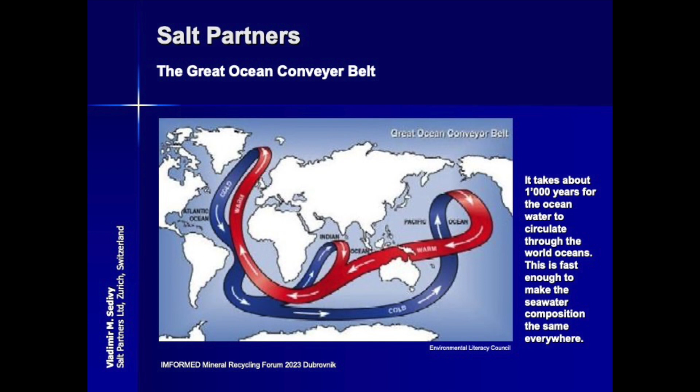The seawater, wherever you start, perhaps somewhere in the Gulf Stream, passing by England, to the north, cooling down and flowing through the Atlantic back to the southern part of the world, and rising, getting warmed up in the Indian Ocean and in the Pacific, and then returning back around the Cape of Good Hope back to the Atlantic. Now, this cycle is very slow.

It takes about 1,000 years for the water to recycle, but considering that the Earth is 4 billion years old, and we have water on the Earth for most of that time, it has recycled many, many times. And this is the reason why the composition of the seawater everywhere in the world is the same. Somewhere it is more diluted, somewhere it is more concentrated, but the composition is the same.

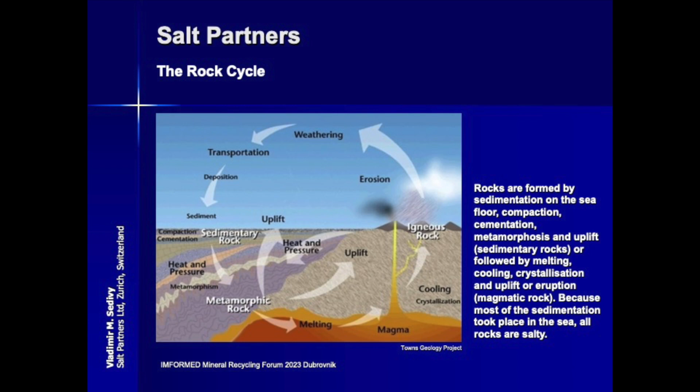Then we have another cycle, we have another recycling, and this is the rock cycle. Most of the rocks, or all of the rocks, actually start with the absorption of carbon dioxide by the calcium present in the seawater, forming calcium carbonate, which then settles at the bottom of the sea as a dust, mud, and proceeds slowly to the deeper parts of the crust until they modify, they cement, they melt, and somewhere again this crust rises up and comes to the surface of the earth as a rock.

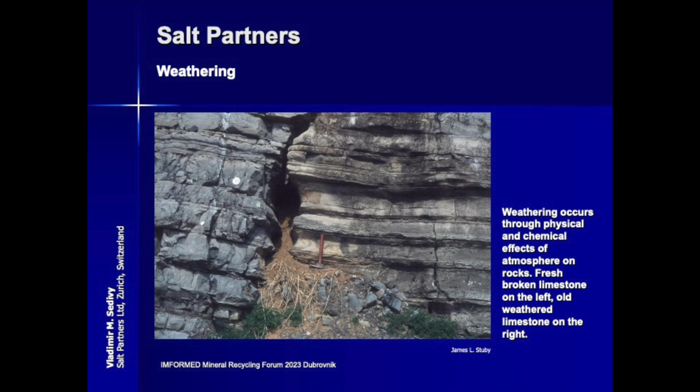Of course, the rock can weather, or it does weather. It is subject to heat and cool and temperature changes, and water effects, carbon dioxide dissolved in the water, and so on and so on. So it weathers. It also weathers by the action of plants and fungi and algae.

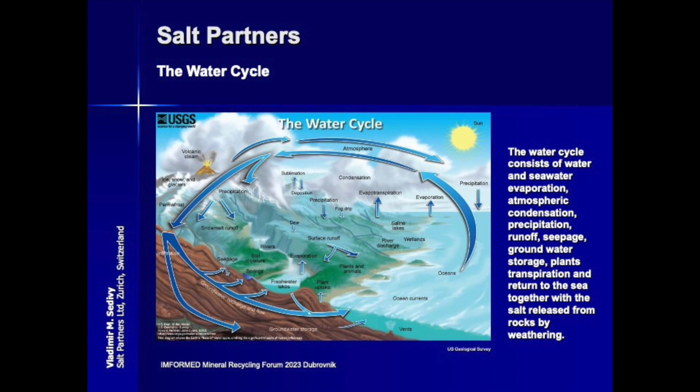And finally, the water cycle consists of evaporation of water from the sea and from transpiration of the plants and getting moved towards the higher areas of the earth where it is cooler, it condenses, falls down as rain, and returns on the surface of the earth, but also underneath the surface back to the sea. So the salt, of course, is a part of the circuit. The salt is present in the rocks. All rocks are salty, and this is how it returns back to the sea.

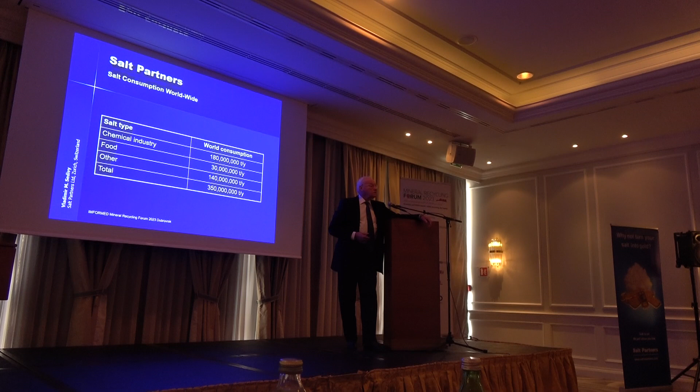What is the quantity of this salt that is being recycled? It's about 4 billion tons per annum. 4 billion tons per annum compares with the quantity of salt that is being produced worldwide, which is around 350 million tons per annum. So only about 1/12, 1/13 of all the salt that is recycled naturally is actually being produced.

And what is the salt being used for? Mostly by the chemical industry for production of caustic and chlorine for production of PVC, which of course is not soluble and is not really practically recyclable, for production of sodium carbonate. Sodium carbonate is used to produce glass. Glass is also not soluble and does not recycle.

So only the salt for food, which is about 1/10 of the total salt produced, is being actually recycled. Whatever salt we take, we also discharge and it goes back. Whatever spaghetti we cook, the water goes back to the sea. So, of course, there is some road de-icing and so on. So only perhaps 30% of the salt that is being produced is actually recycled. So out of the 350 million, perhaps 100 million is being recycled.

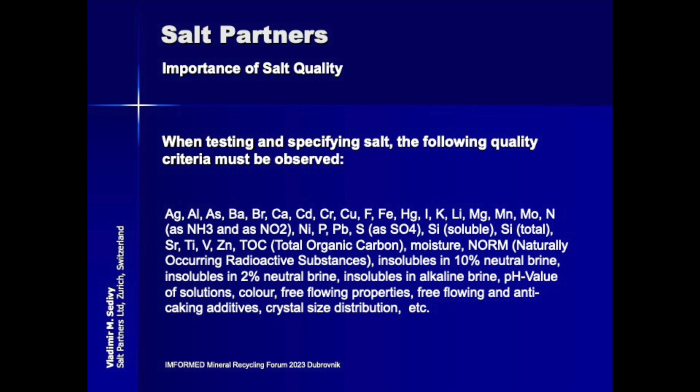When I started in salt some 50 years ago, we were looking at 3 impurities in the salt, or perhaps 4, which was calcium, magnesium, sulfate, and insolubles. Nowadays, when we are testing salt for some use, whoever comes to us and says, I have salt and I want to make salt for human consumption, or for this and that, we say, let's take a look at what is there in that salt, except for sodium chloride. And this is the list. It's a very, very long list. For any use of salt, every one of these elements plays a role.

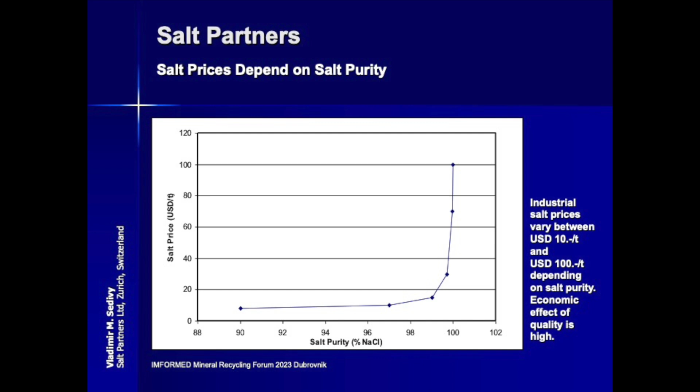Then there is the question of the cost and the price of the salt. This curve shows that generally the price of the salt, cost of the salt, is a question of purity. The purity of the salt that is being produced and consumed starts at around 90% purity and about $10 per ton, and it rises up to $100 per ton for good quality vacuum salt for electrolytical purposes. So there are huge differences in prices.

Does it make sense to produce or recycle salt and compete with new, freshly produced salt specific for the purpose? One of these applications that we are confronted with on a weekly basis, getting inquiries, is a desalination plant with desalination reject. There's a lot of salt in it, and we would like to utilize the salt. The reject has usually around 6, perhaps 7% concentration.

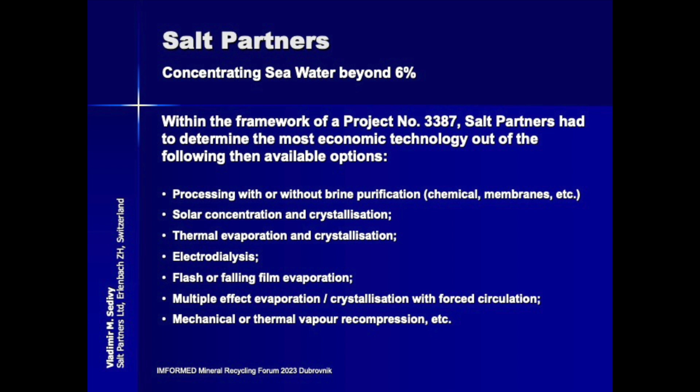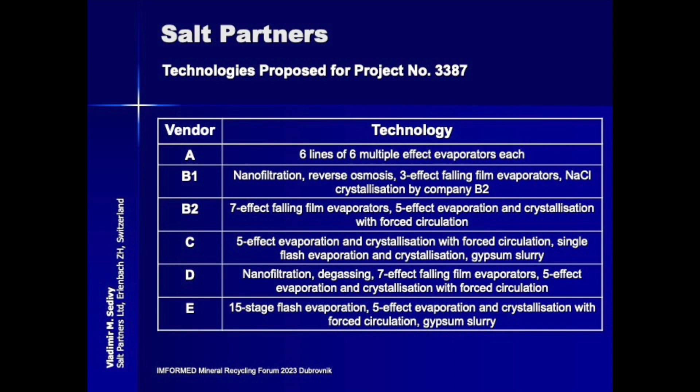We were looking in connection with this project into possibilities, into technologies that exist, and into the cost of these technologies, how to actually make salt. These are the 6 or 7 technologies we looked at, and we calculated the capital cost, operating cost, financing cost, and possible selling price of the salt depending on the quality that can be obtained. These were the 6 major offers after evaluating about 15 various suppliers and their technologies, comparing them. We evaluated the profitability on the basis of the cost of steam and electricity and so on.

We have seen that there was only one that offered a reasonable return on investment. All the others gave 6 to 8%, and nobody would spend money on a large project to get only 6, 7, or 8%, 9% return. This return on investment was quite unique.

It was only due to the fact that the selling price of the salt was very high, in a place where salt was not available. It was also due to the fact that this was a large industrial project with its own power station, and there was a bleed of steam available from the turbine that they didn't know what to do with - condense it or recompress it and reuse it. So there was steam actually available at negative cost, and therefore there was a possibility to do it profitably. But that is unique, and we have so far not identified any other project where this would be possible to do profitably.

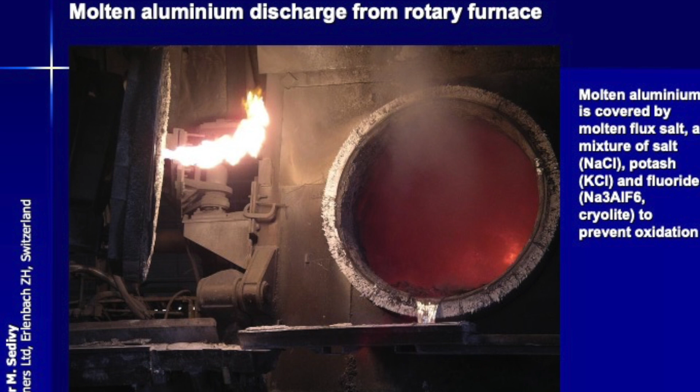There are cases where it makes sense, and one of the cases is aluminium recycling, a project we did in the United States. There is a rotary smelting or remelting furnace, heated with natural gas flame. When the aluminium is melted, it's poured out of the furnace.

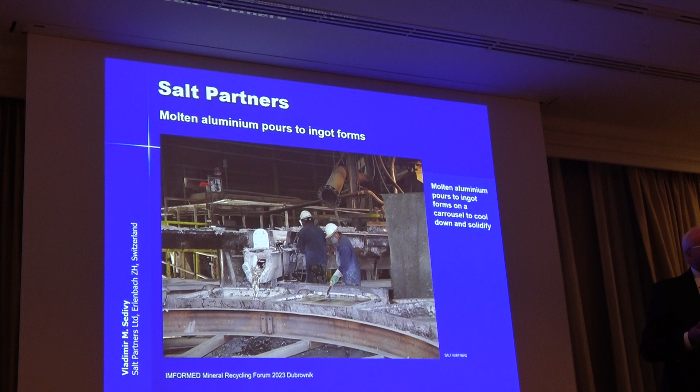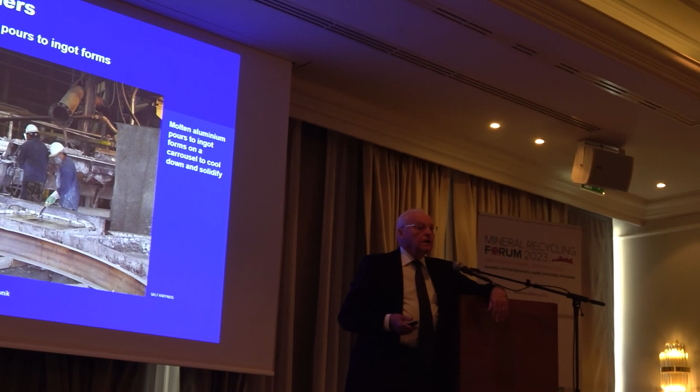In the furnace, the molten aluminium at about 650 degrees centigrade is covered by a layer of salt. But the salt is not just sodium chloride - it's a mixture of potassium chloride and sodium chloride, and this eutectic mixture has a melting point just slightly below the melting point of aluminium. Therefore it's lighter than aluminium, so it floats on the aluminium and prevents oxidation of the aluminium, at least partially. It consists mainly of the salt, but also some aluminium oxide and some burnt carbon from the sugars from the cans, from beer and Coca-Cola and so on.

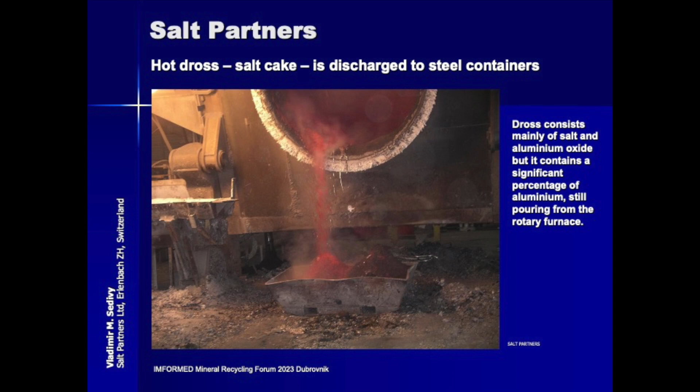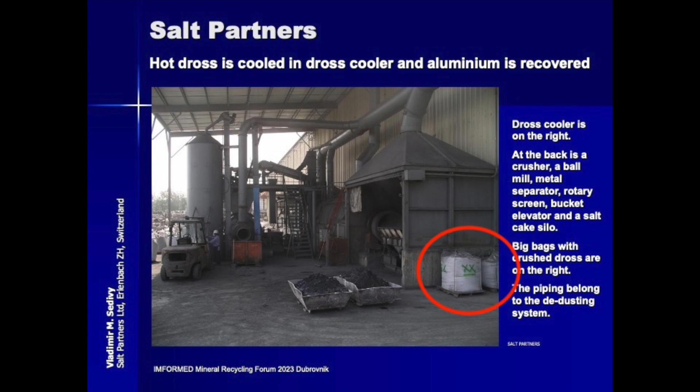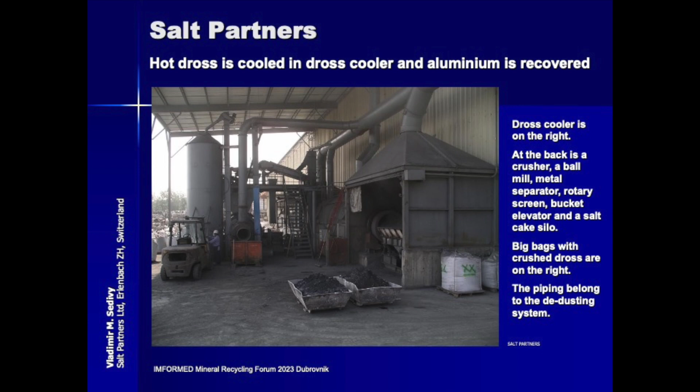And then there's a question what to do with it. When it gets wet, it smells terribly - it's a formation of ammonia and other mercaptans and so on. Terrible thing, so it has to be kept dry. That means storage cost.

At the time of this project, potassium chloride was selling at $700 a ton. Salt was selling at about $50 to $60 a ton. So it was not the value of the sodium chloride, it was the value of the potassium chloride that was driving this project.

We signed a contract with the owners of this recycling company, and we offered our technology consisting of crushing, milling, screening, then desalting. That was the core technology from us - the Hydrosal technology for dissolving or leaching the salts out of the dross, so that at the bottom of the extraction equipment the dross was salt-free, so it could be sold, for example, as a cement additive.

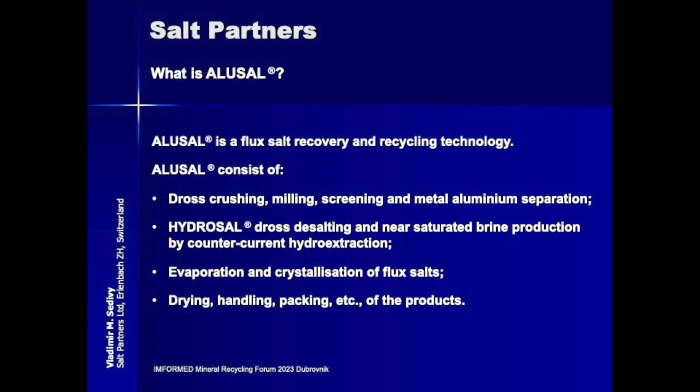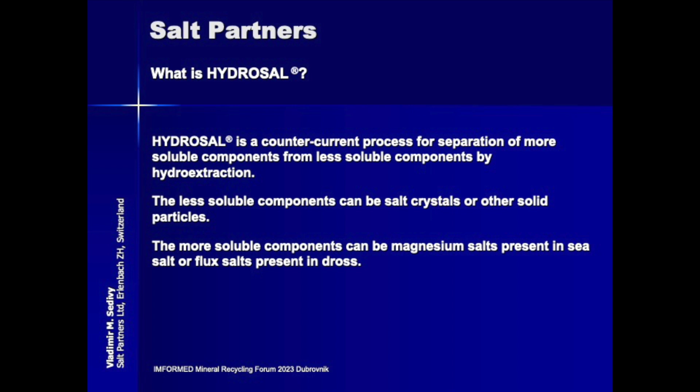That was the reason why I was asking before - to get the liquid at the top of the extraction tower at the highest possible concentration, so that the recrystallization of this material afterwards would be from concentrated liquid, and therefore economic. And then, of course, evaporation and crystallization of the flux of salts, drying, handling, packing. Hydrosal is a countercurrent process capable of doing this - salt-free at the bottom and concentrated salt at the top.

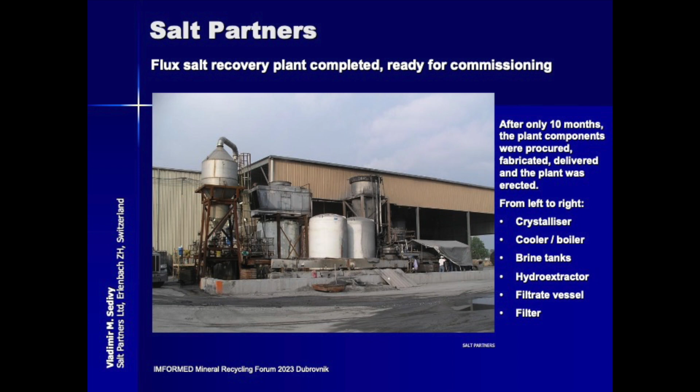And this is how the plant looked like. It was not a big plant, but it worked very well. It consisted of the hydro extraction - this is the collection of the brine, this is the evaporation and crystallization, here is the filter for the desalted dross, and this is the hydro extractor viewed from the floor.

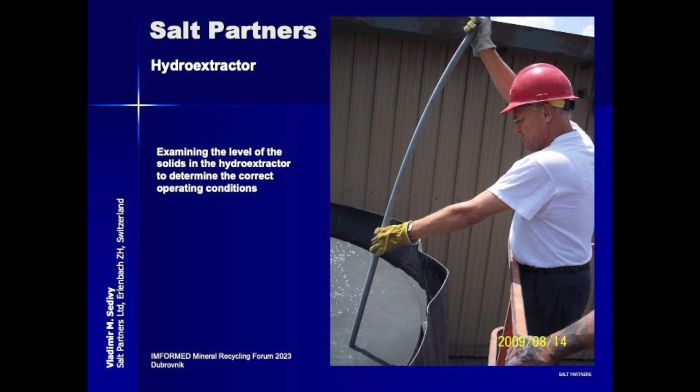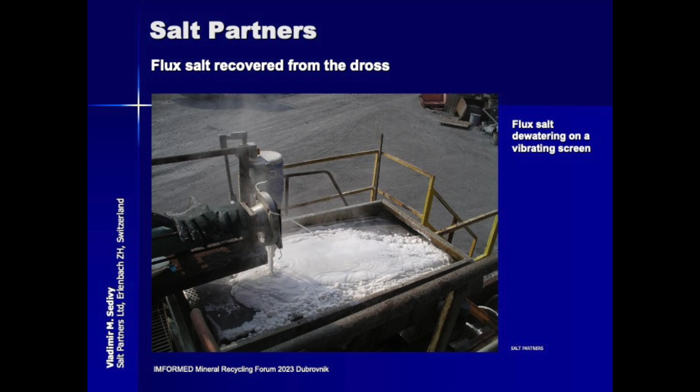Now, when does it make sense to do recycling of salt? Certainly not if you cook spaghetti and want to evaporate the water to dryness and reuse the salt - definitely not. It makes sense if the brine is available at a high concentration, if solar concentration and crystallization is possible.

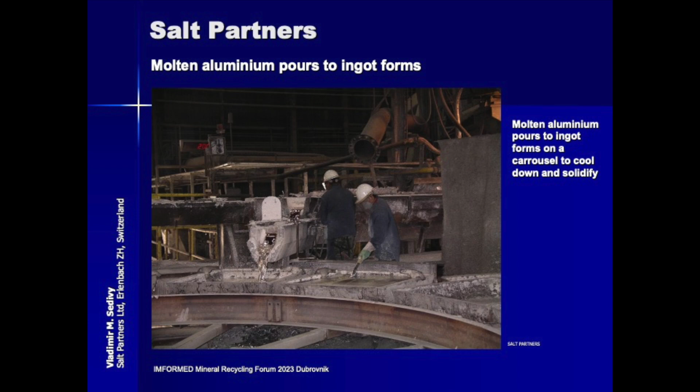You need 650 kilocalories to evaporate 1 kilo of water. You only need 100 kilocalories to heat water from 0 to 100, so it's 6.5 times more to evaporate the water - this is an awful lot of energy. The only energy we have available more or less free of charge is solar energy, and solar evaporators, the ponds, are the most efficient collectors of solar radiation and environmental energy, assisted by the wind. There is no competition to that - any other energy is less efficient.

Thermal evaporation, if steam or power is very cheap. Membrane technologies, if steam is expensive, because membrane technologies require lots of energy and power to press the water through the membrane at pressures of 60 bar, or the high utilization membranes at 120 bar - an enormous pressure, an enormous amount of energy that is needed.

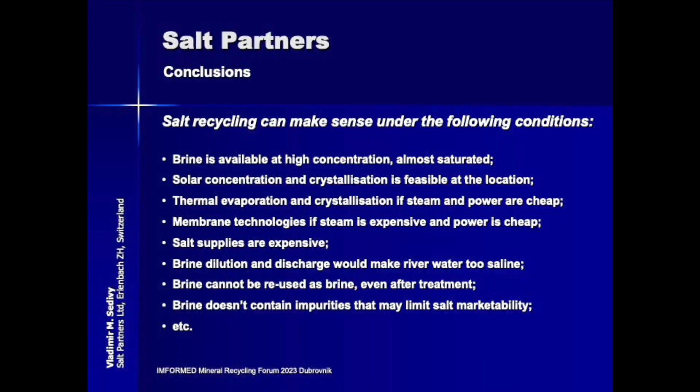If salt is expensive, if dilution of the discharge brine to the rivers is not possible, and if brine cannot be reused as such - for example for water softening, where you put a high concentration of brine into the ion exchanger and get it back with just a little calcium, so potentially you could reuse it - and if the brine does not contain impurities that limit salt marketability, which is the list of elements I was presenting before...